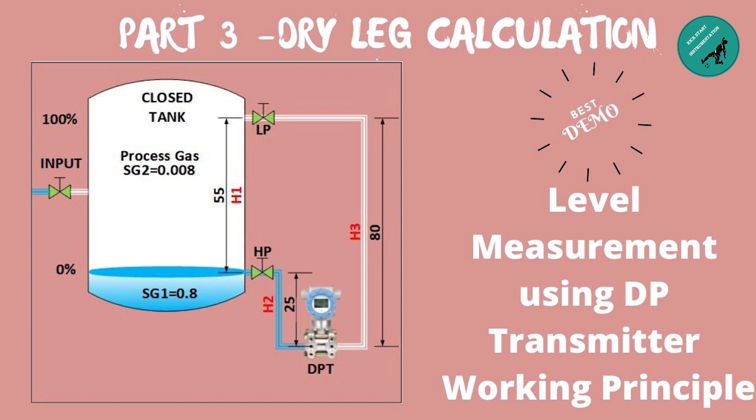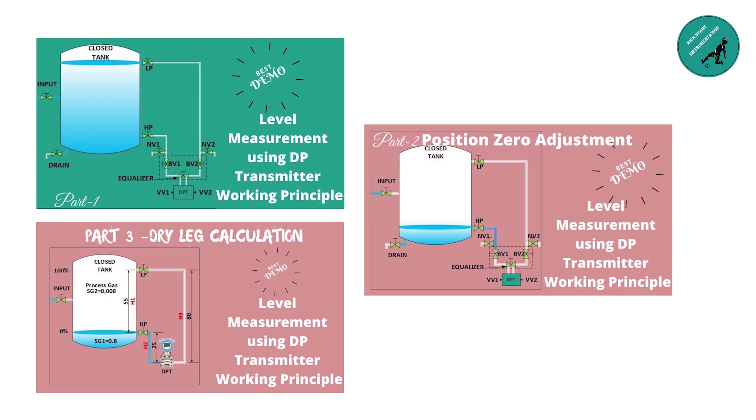In part 3, you learned dry leg calculation and instrument setting procedure. Now in part 4, you will learn wet leg calculation and instrument setting procedure. This will be more or less similar to dry leg calculation with slight changes. Still, make sure to follow all steps to be clear in the concept. If you missed any parts, please go back and watch them for better understanding. The link is given in the description below.

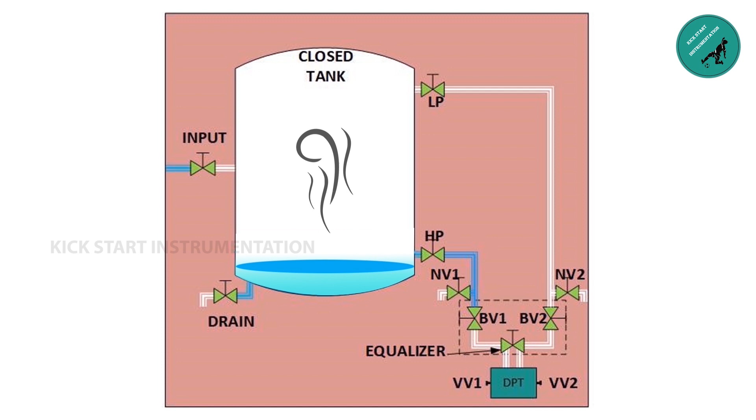Now, the question is, what is wet leg? There is a process medium whose level needs to be measured. We know that in a closed tank, the process medium will be vaporized due to continuous change in atmospheric temperature. The vaporized process medium will either evaporate or condense back to its original state.

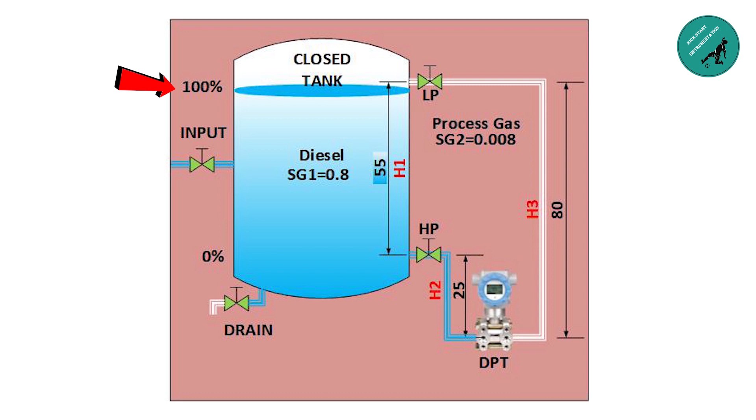Let us take water as the process medium. We know that water will condense. If water is condensed and the tank is full, that is 100%, then the low pressure side of the stainless steel tube will be filled with water. Thus, the pressure acting on the low pressure side of the instrument will change suddenly. This will not give exact level measurement. Thus, we will fill the low pressure side with water at all times even though the tank is not full. This is called wet leg.

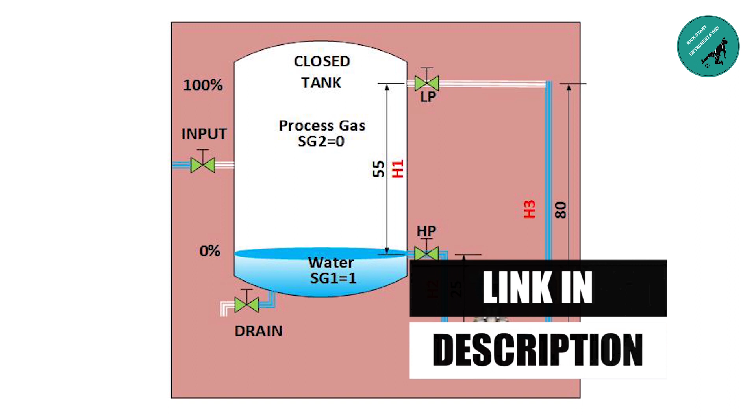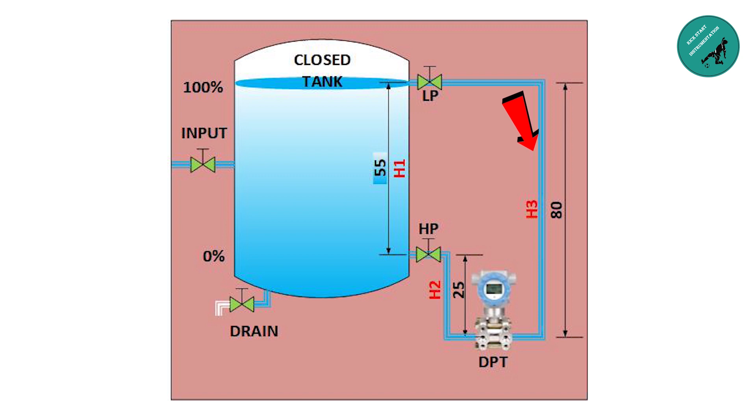After position 0 adjustment, this is the state of the tank. Let us fill the low pressure side stainless steel tube with water manually. Let us open the tank input valve and fill the tank with water till the low pressure stainless steel tube is filled with water. Once it is filled, let us close the input valve and open the drain valve of the tank. Close the drain valve when water reaches the high pressure tapping point. Now we see that the low pressure side stainless steel tube is filled with water.

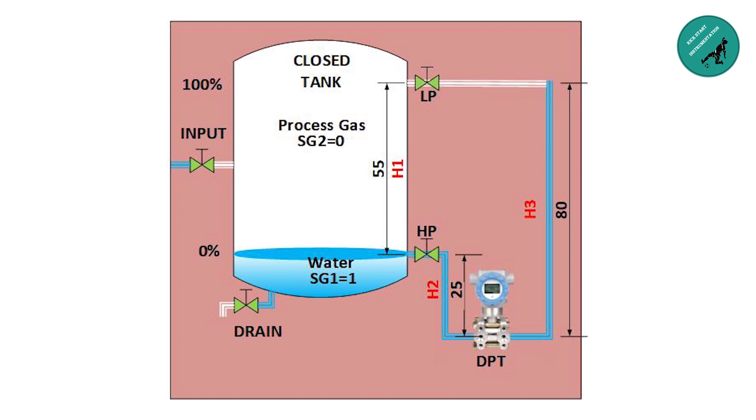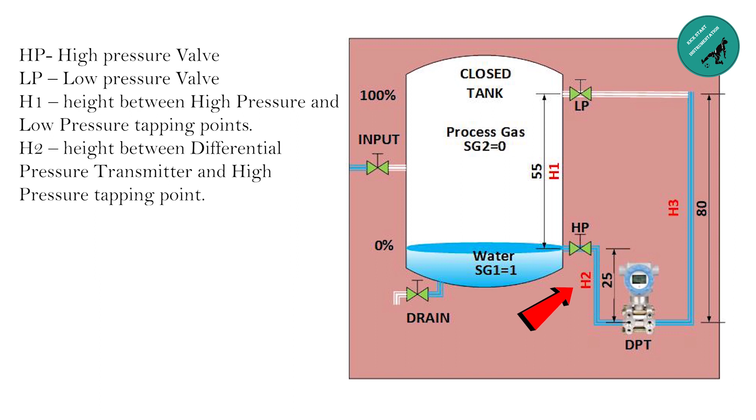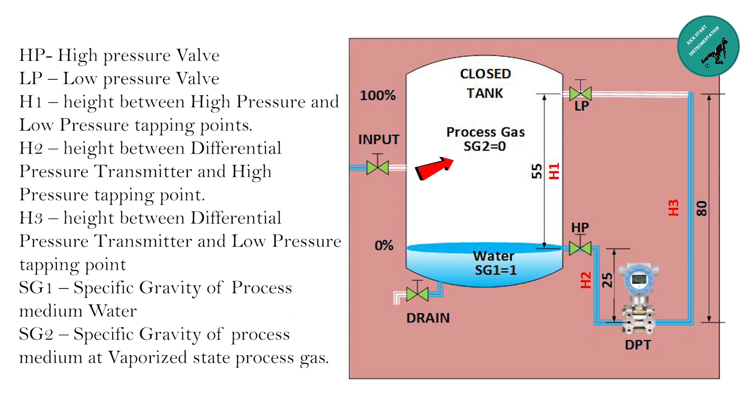Let us see the description here. HP is high pressure valve, LP is low pressure valve, H1 is the height between high pressure and low pressure tapping points, H2 is the height between the differential pressure transmitter and the high pressure tapping point, H3 is the height between the differential pressure transmitter and the low pressure tapping point, SG1 is the specific gravity of the process medium, that is water, SG2 is the specific gravity of the process medium at vaporized state, that is process gas. We have to measure LRV and URV, which is lower range value and upper range value.

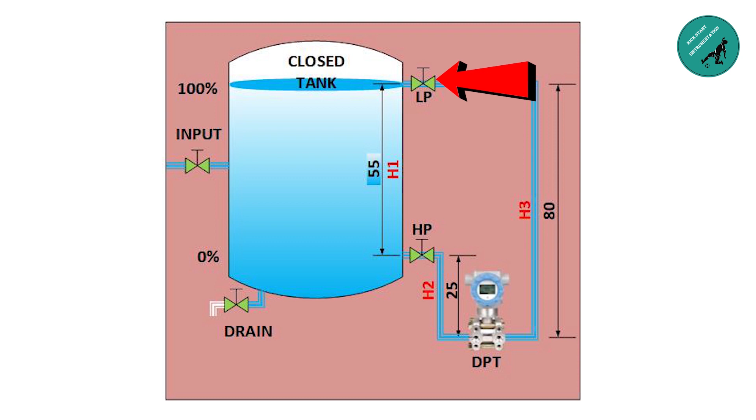LRV is calculated assuming there is no water between the high pressure tapping point and the low pressure tapping point. URV is calculated assuming there is water between the high pressure tapping point and the low pressure tapping point. You may wonder why we need to assume this. Yes, we are doing a calculation for which we need not fill and empty the tank. Assumption is more than enough.

Before we start the calculation, let us understand the tank in detail. We take level 0% at the high pressure tapping point. Below this 0%, water will always be there. We take 100% at the low pressure tapping point.

To calculate LRV, we see that from level 0% to 100%, process gas is present. So both the pressure of water as well as the pressure of process gas will act on the high pressure side of the differential pressure transmitter through the high pressure valve and stainless steel tube. Only the pressure of water will act on the low pressure side of the differential pressure transmitter.

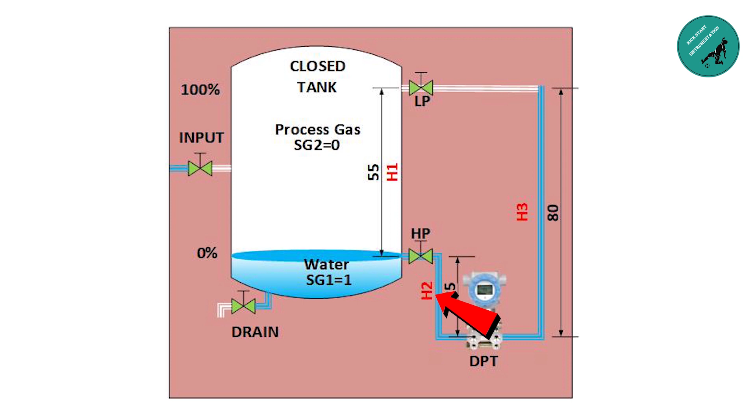Height 1 is filled with process gas, so we take the specific gravity of process gas. Height 2 and height 3 are filled with water, so we take the specific gravity of water. The specific gravity of water is 1, that is SG1, and the specific gravity of process gas is 0, that is SG2. Now we will do the calculation.

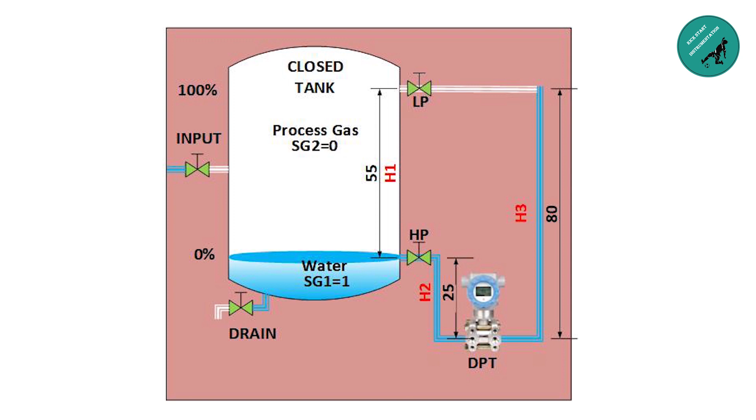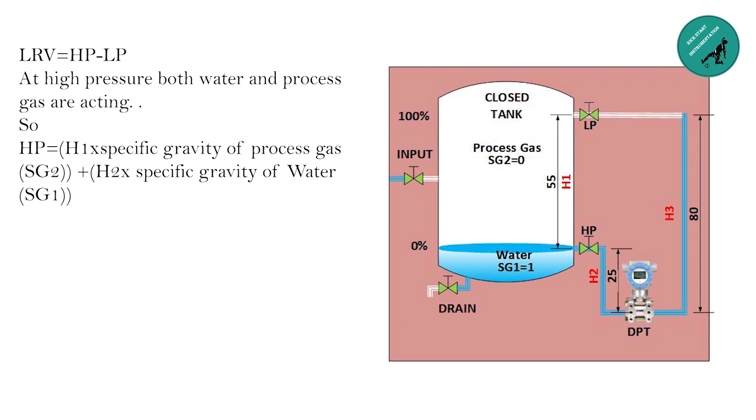LRV is equal to HP minus LP. At high pressure, both water and process gas are acting. So HP is equal to H1 into specific gravity of process gas SG2, plus H2 into specific gravity of water SG1, equal to 55 into 0 plus 25 into 1, equal to 0 plus 25, equal to 25.

At low pressure, only water is acting. So low pressure is equal to H3 into specific gravity of water SG1, equal to 80 into 1, which is equal to 80.

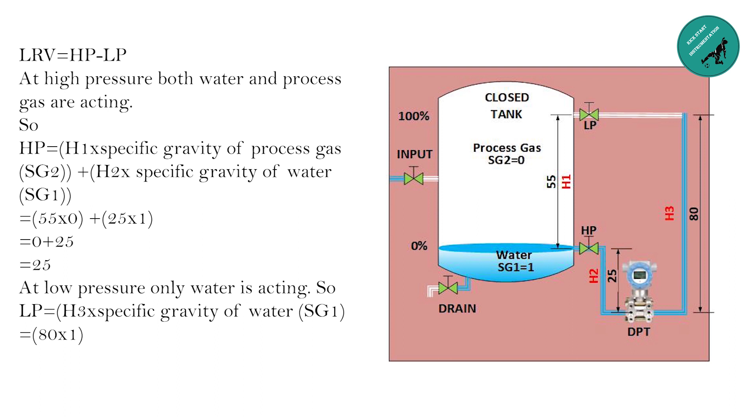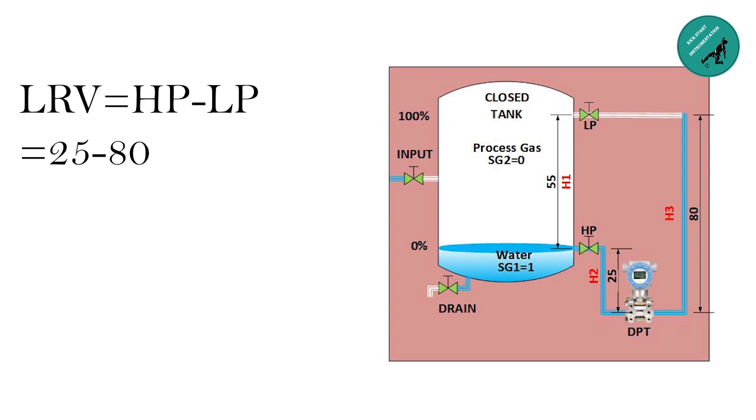LRV is equal to Hp minus Lp, which is equal to 25 minus 80, equal to minus 55 mmWc. mmWc is millimeters water column.

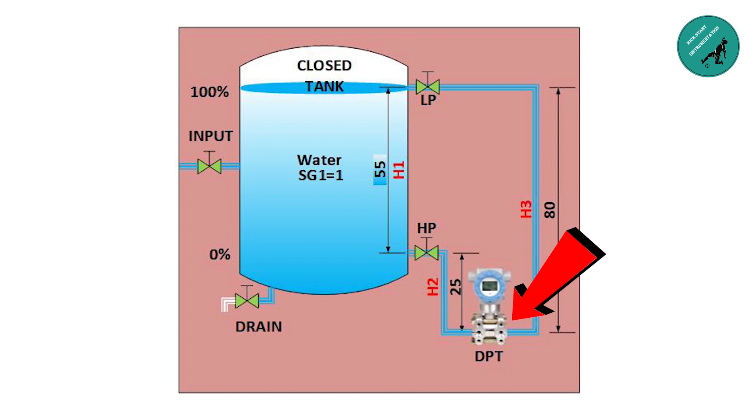To calculate URV, we see from level 0% to level 100% water is present. So only pressure of water will act on the high pressure side of the differential pressure transmitter through the high pressure valve and stainless steel tube. Same, only pressure of water will act on the low pressure side through the low pressure valve and stainless steel tube.

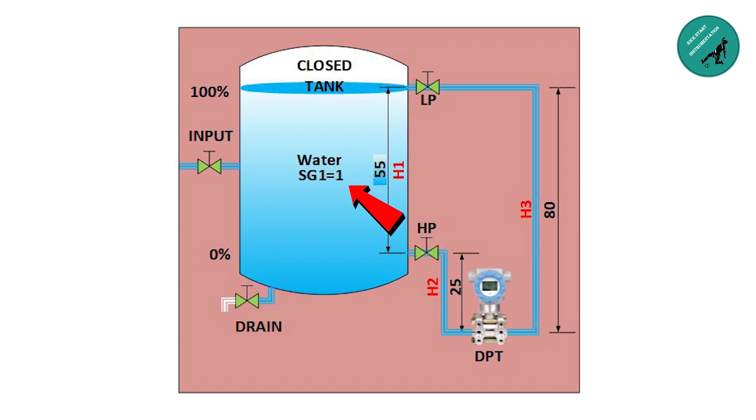Height 1, height 2 and height 3 are filled with water, so we will take the specific gravity of water. The specific gravity of water is 1, that is Sg1. Now we will do the calculation.

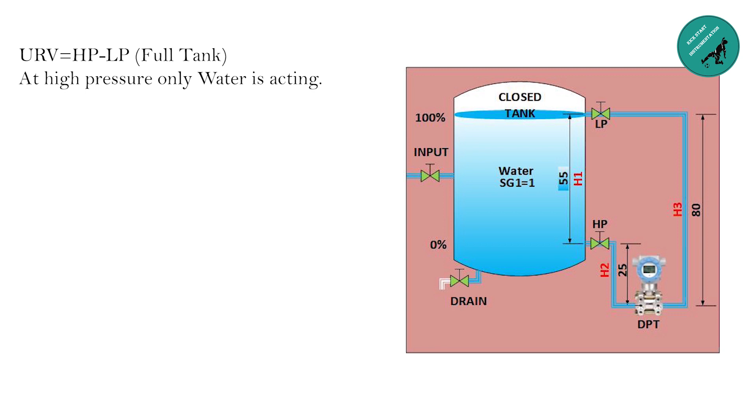URV is equal to Hp minus Lp. At high pressure, only water is acting. So Hp is equal to H1 into specific gravity of water Sg1 plus H2 into specific gravity of water Sg1, which is equal to 55 into 1 plus 25 into 1, which is equal to 55 plus 25, equal to 80.

At low pressure, only water is acting. So Lp is equal to H3 into Sg1. H3 is 80 into 1, equal to 80. URV is equal to Hp minus Lp. Hp is 80 minus Lp is 80, which is equal to 0 mmWc. mmWc is millimeters water column.

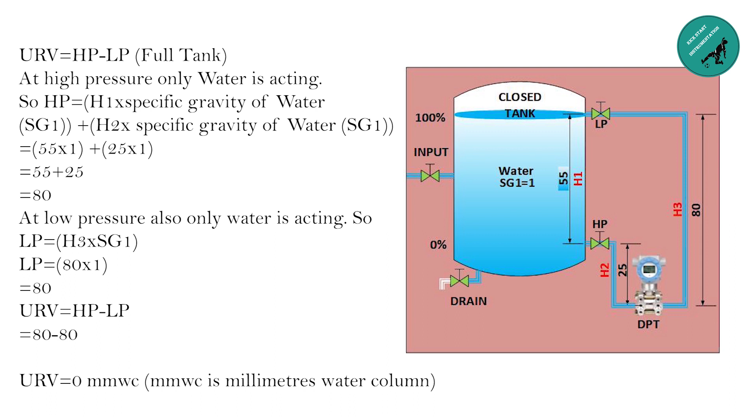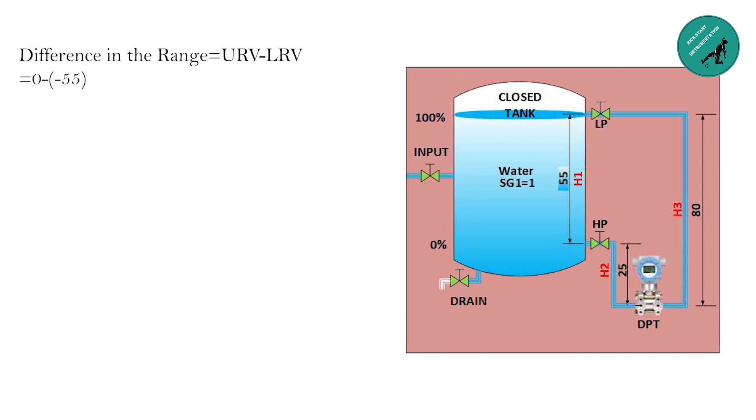Difference in the range, which is equal to URV minus LRV. URV is equal to 0 minus LRV is equal to minus 55, which is equal to 55 mmWc.

Now we have calculated LRV and URV for wet leg. These values need to be fed into the instrument so as to get the exact level of the closed tank using differential pressure transmitter.

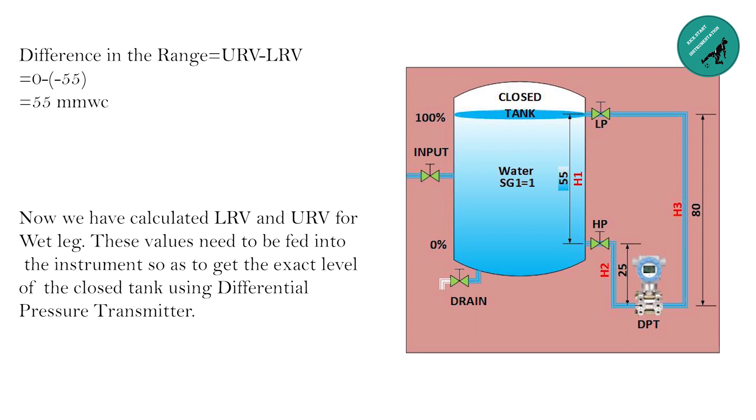I have taken E&H DPT for explaining. Same procedure with small changes will be applied for other makes. We can use their data sheets for better output. Calibration can be done in two methods, one by entering the pressure value and the other by entering the height. We are going to enter the height.

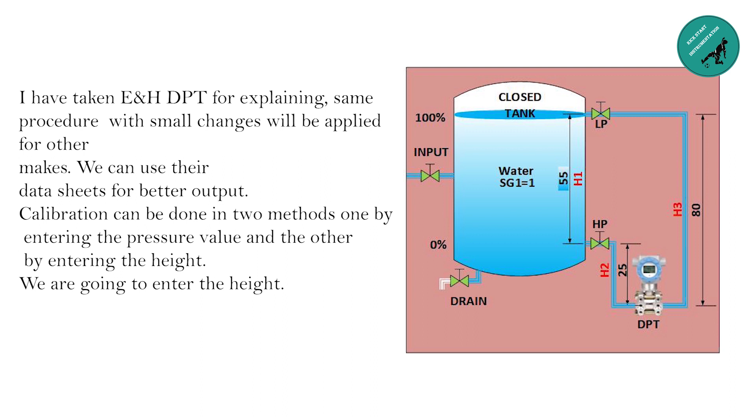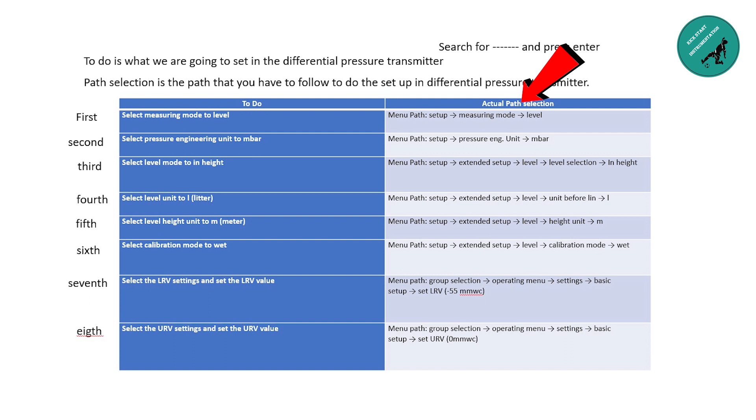This is what we are going to set in the differential pressure transmitter. Actual path selection is the path that you have to follow to do the setup. First, select measuring mode to level. Menu path: search for setup and press enter. Search for measuring mode and press enter. Search for level and press enter.

Second, select pressure engineering unit to millibar. Menu path: search for setup and press enter. Search for pressure engineering unit and press enter. Search for millibar and press enter.

Third, select level mode to in height. Menu path: search for setup and press enter. Search for extended setup and press enter. Search for level and press enter. Search for level selection and press enter. Search for in height and press enter.

Fourth, select level unit to liter. Menu path: search for setup and press enter. Search for extended setup and press enter. Search for level and press enter. Search for unit before lin and press enter. Search for L and press enter.

Fifth, select level height unit to meter. Menu path: search for setup and press enter. Search for extended setup and press enter. Search for level and press enter. Search for height unit and press enter. Search for M and press enter.

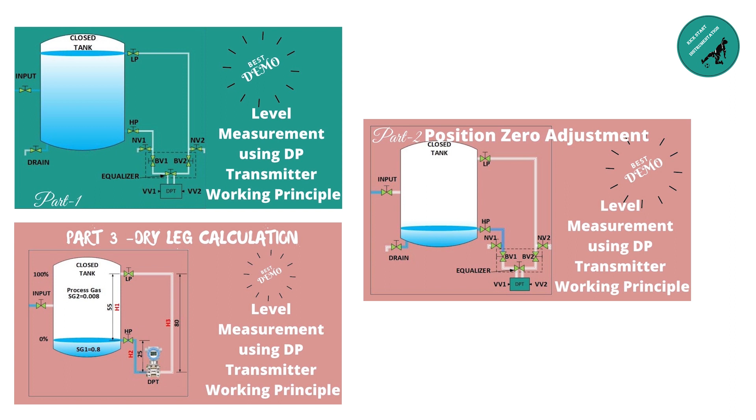Finally, measuring range for this tank is set, and the same will be transmitted to PLC as 4 to 20 milliamps. Thank you friends for watching this video. We completed all 4 parts of videos of level measurement using differential pressure transmitter.